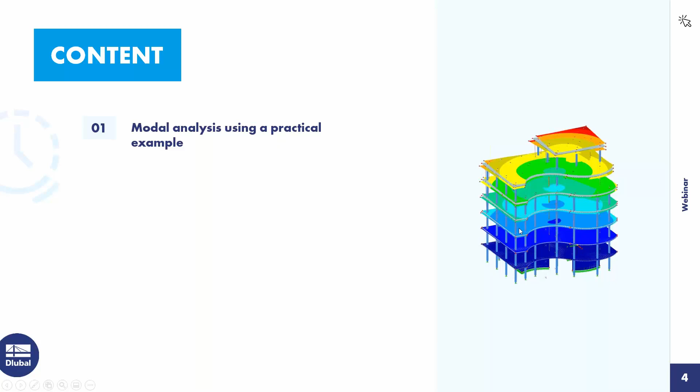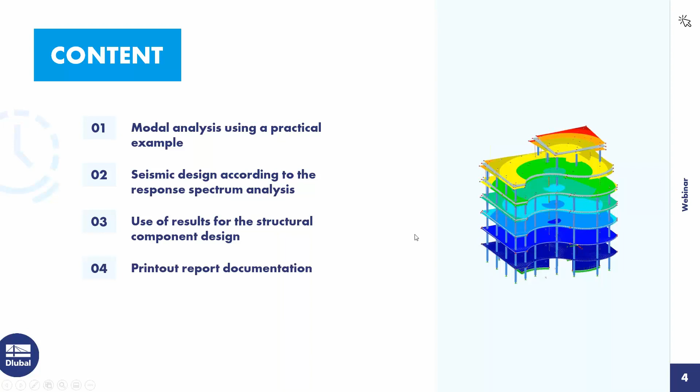To the agenda today, first point is modal analysis using a practical example. That's the example here on the right side of the screen. Then point 2, seismic design according to the response spectrum analysis. Then use of results for the structural component design. And the last point is printout report documentation. Then I hand over the screen to Stefan Frenzel. Stefan, it's your turn.

Okay, hello again. In the first part, I want to show you today RFEM 6 with the new Dynam add-on, where we want to do a modal analysis for the structure which you can see here on the screen. Our structure today is made out of concrete, so we have some concrete slabs, concrete walls, and also concrete surfaces, or floors. And for this structure, we want to do at first a modal analysis.

You see here in the control panel the material and also the surface thicknesses. I think that is already known. But how can we do a modal analysis in this case? In RFEM 6, we have a new type for modal analysis. It's not an add-on module like in RFEM 5. Here it is possible to do the modal analysis globally in the system. That means we will have the results in the table on the bottom, and also the input data in the navigator on the left side.

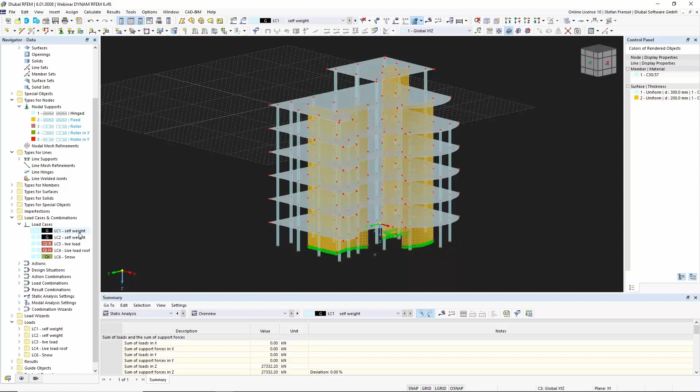A modal analysis is not an add-on module anymore, so we can define the modal analysis directly in a load case. That means we have the categories in the load cases, and for this category, static analysis is clear. We can calculate internal forces, but it is now also possible to do a modal analysis. If we want to do a modal analysis, it is possible to choose the masses which have to be imported in the program.

Therefore, you see here load case number 1, the self-weight. So we want to import the masses from load case 1 to this modal analysis. That means the self-weight is activated, and of course we have here some modal analysis settings. That means modal analysis setting 1. We want to calculate 4 eigenvalues with a Lanczos solver.

So here it's of course possible to change the settings, or you can also add some settings, or you can delete the settings if you want. These settings are normally just important for the modal analysis. That means at first you have to choose, of course, how many eigenvalues you want to calculate for the structure. In our case, we have 4 eigenmodes.

And of course, here it is possible to calculate automatically to reach the maximum natural frequency. That means you give in here a maximum frequency, and the program will calculate so many eigenvalues until 1600 Hertz in this case. For our example, we want to do a user-defined analysis. That means we want to calculate at first 4 eigenvalues. And that's normally all.

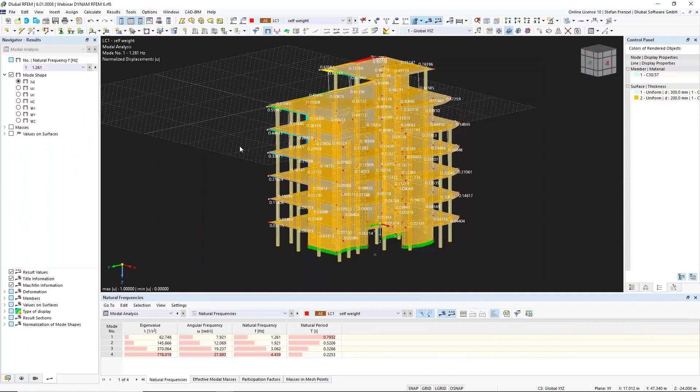And then you will see that the program will now calculate the eigenvalues of the structure with a Lanczos solver. Here just one core of the computer is used. That's caused by the eigenvalue analysis. It is not possible to use more cores than one. And then you see, of course, the results. That was really easy.

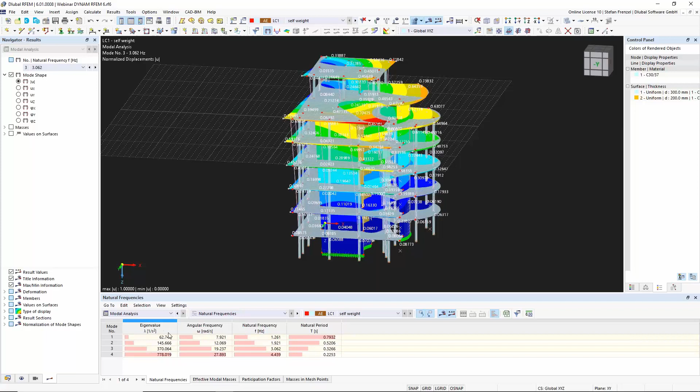So we have now here the natural frequencies, where you can choose, for example, the second frequency or the third one, and that's all in the navigator of the results. Another thing is that it's possible to have a look in the table on the bottom, where you can see the natural frequencies: the eigenvalues, the natural frequency, the natural period.

Then you see, of course, the effective modal mass factors. These effective modal mass factors are also important, because normally we need 90% of the effective modal mass in each direction for the earthquake calculation. And these ones you can see directly on the top or on the bottom.

We have also the rotational effective modal mass factors, but that's normally just for development. That's not so important for the normal user, because the normal user who wants to calculate earthquake loads normally uses just the translational effective modal masses, which are in X and Y direction, and maybe sometimes in Z direction. The participation factors are also given out here. You can see it on the bottom.

And then you see, of course, the masses in mesh points. Maybe you know this from RFEM 5. It was also possible to have a look at the masses in the FE mesh points. It's normally not so easy to take a good look in this table, because you have to scroll down and maybe you don't find the node you want. And therefore we have now a graphical output for that.

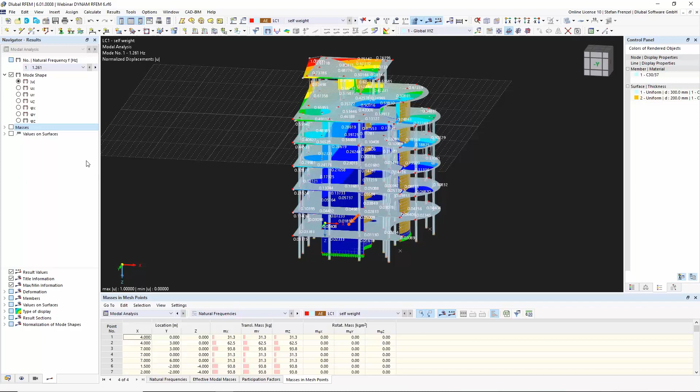That means you just go here in the navigator for the results, and if you click on masses, the program will show you all masses in each FE mesh point. That doesn't look so nice now, but I can zoom in a little bit. And then you see, of course, mass balls, we call them mass balls, in each FE node.

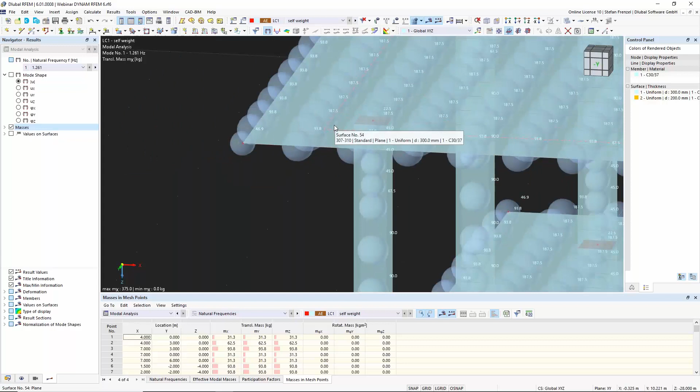And here, of course, you can have a look at them, and maybe you can also say, for example, you want to deactivate the masses for this surface or for this top surface, then you can control it afterwards. So that's what we want to do now.

We go on edit, and here in our modal analysis settings, we can neglect the masses. I want to use user defined, and I just want to select the surface. Then I just have to click my object, and that's all. So please neglect masses in all directions and around all directions.

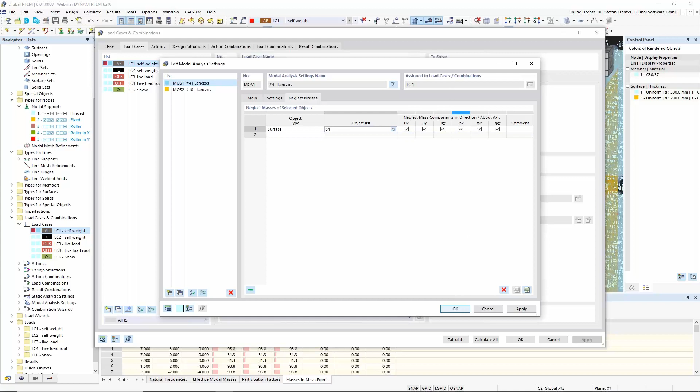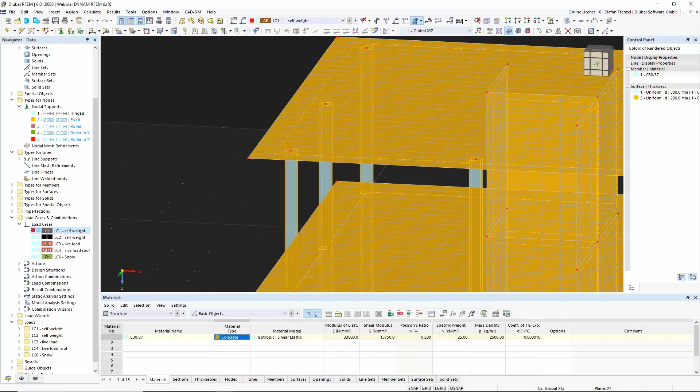And if I do this and do the calculation again, then I will get, of course, the result. And when I have a look at the masses now, all masses will be neglected on the surface. I think that's an advantage in RFEM 6 that was not possible so directly in RFEM 5, because here you see directly the values on each FE mesh point. And it makes it really easy to control the whole result.

Another option, if you do such a modal analysis: in RFEM 5 it was possible to add additional masses, but only in the add-on module. Here we changed it a little bit, and now it's possible to add masses with the normal nodal loads, line loads or surface loads. If you click here in the nodal load, for example, it is possible for the load type to choose a mass.

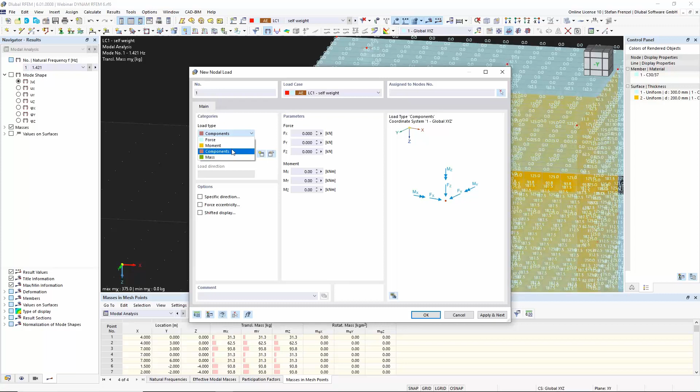And if you write in here a mass, maybe 20 tons, and you put it in here, then you will see in load case number 1 a mass ball with 20 tons. And this mass ball is also considered now in the modal analysis of the whole structure.

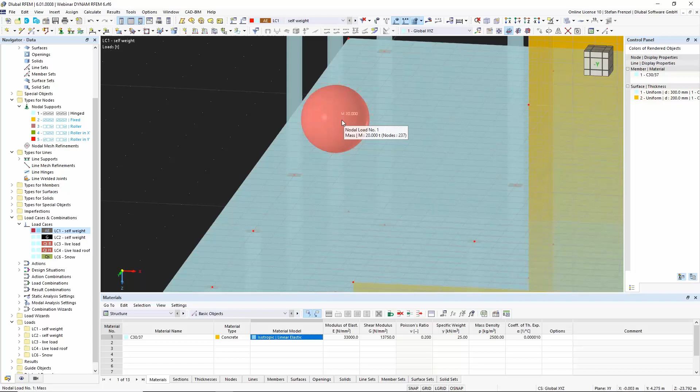That's what I want to show you here, because it's also possible to do it for surface loads and also for member loads, to add additional masses in the program and to have a direct view of them. That was not possible in the old programs, and that's also an advantage here.

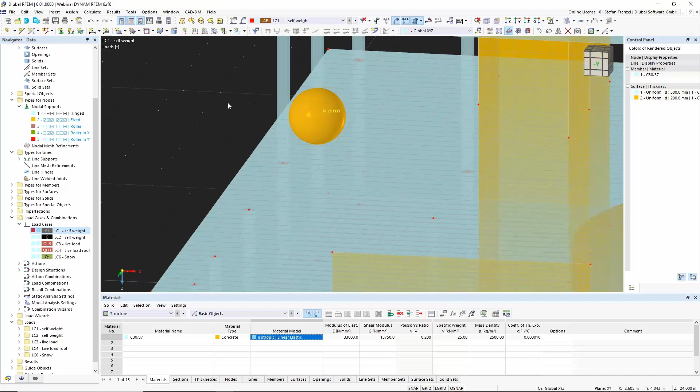So then I want to delete this load, because now we want to do a real modal analysis for the whole structure, and therefore I will first change my modal analysis settings, because here we also have the neglection of masses on, and we don't want this. And here we want to calculate 12 eigenvalues, but with a diagonal matrix, which is completely enough for earthquake calculations afterwards.

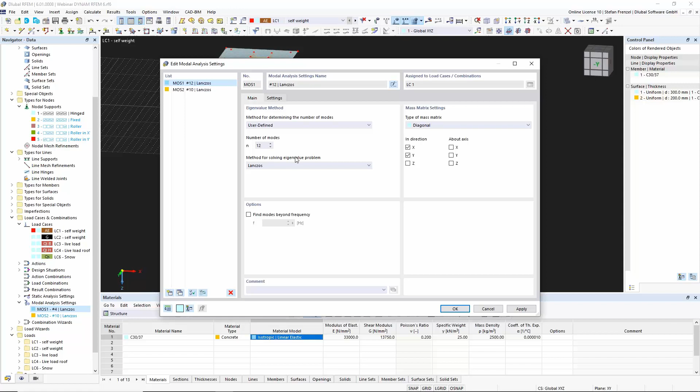Because we just want to consider the x and y direction, I deactivate the other direction z and also about the axes x, y, z, because it makes no sense for us, and the calculation is faster when I don't have to consider all directions. And of course it's easier for me to reach the 90% of the effective modal mass factor afterwards, so I don't need so many eigenvalues. That means the performance is better.

Okay, now we are here in our structure. In the old one it was normally like this, that we did a static analysis. Wait a second, I just have to change it back. Now we need, of course, a modal analysis. If we want to do such a modal analysis, I have to choose a design code first. For example, in our structure it should be Eurocode 8. You can also choose AISC or whatever.

That's not so important for the program, but the important thing is that we can now create a design situation. For this design situation, it's possible to create a seismic mass combination. That means the program will calculate a mass situation for our modal analysis according to a design code, automatically. So if I go now to action combinations and load combinations, the program creates a load combination.

So now I have my masses here, which I need for the design or for the modal analysis according to the standard. To take this mass combination or load combination, I can go into the base data load cases and create a new load case. This new load case should be a modal analysis. I have here my modal analysis settings, which I changed before - we want to calculate 12 eigenvalues with a Lanczos solver. That's all at this point.

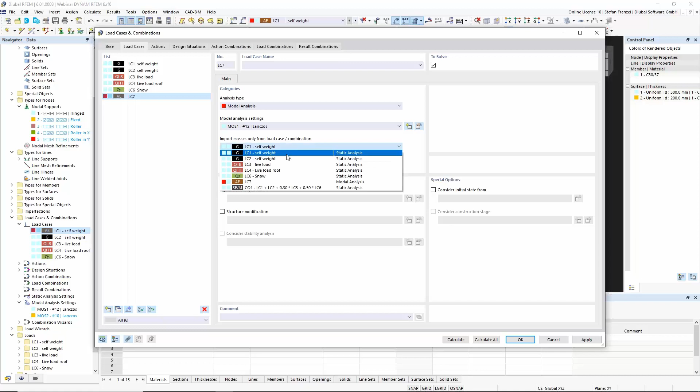The important thing now is that we can use the automatically created load combination for my seismic mass combination. That's important, because that was not possible in the old version. Here it is now possible to consider this mass combination or load combination for the calculation of the modal, or of the eigenvalues.

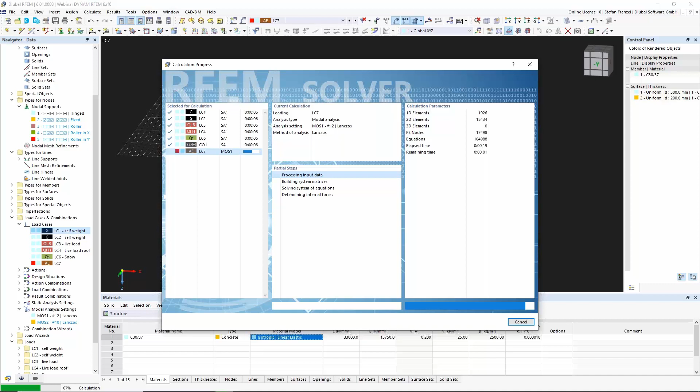With this option, we click OK, and then we do a calculation of the whole structure. You will see the program calculate all load cases, and of course the seismic mass combination, and afterwards load case number 7, my modal analysis. You also saw that the program calculated all load cases nearly at the same time - that means we have a multi-core calculation. The program can use all cores of your CPU, which makes it really fast in this case. So now we want to deactivate the masses because I don't want to see them.

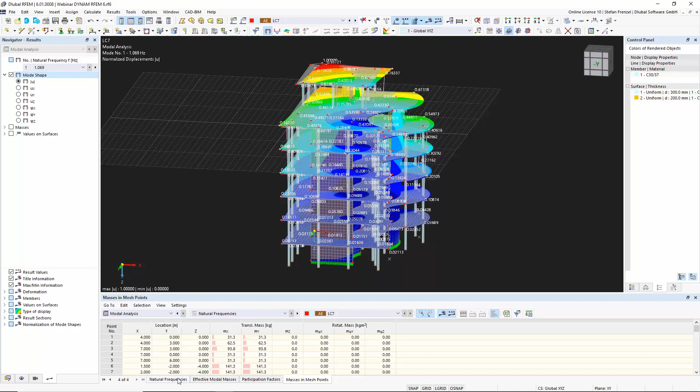Here maybe I want to have a look at the mode shapes. But what is important for me now is really easy - the effective modal mass factors. So I just have to click on the modal analysis, the natural frequencies, or the effective modal mass factors, whatever I want to see. And now I can see I have 97% in the X direction, and nearly 94% in the Y direction. This is really good for me, because with these values I can do a response spectrum analysis.

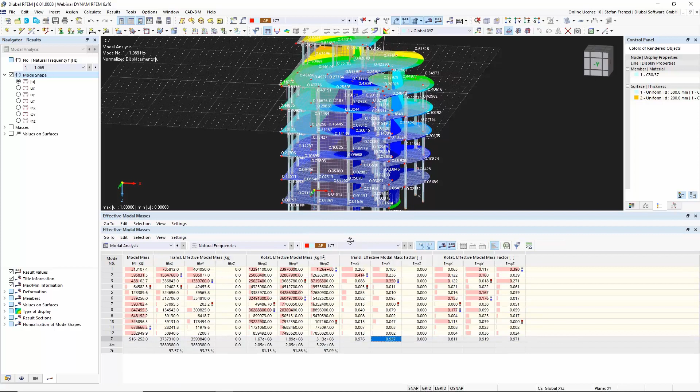But how we can perform a response spectrum analysis, that is now the important thing for us. To do a modal response spectrum analysis, we have to go back into the navigator, and click again on the base data, because here in the base data we can switch our add-on modules on and off, which is also important for us.

In this case, we go to the add-ons, and here it's now possible to choose the response spectrum analysis. The response spectrum analysis will calculate the internal forces of the whole structure, and with these internal forces we can work for the design of the concrete members or concrete surfaces, because afterwards we can create a result combination with the maximum loads, or the maximum internal forces. So now you see here the response spectrum analysis, which we added.

Then we have to go into the Standards 2 button. Here you see, okay, we do the calculation according to the national annex of the Eurocode. And for this national annex, we can now just create our response spectra here.

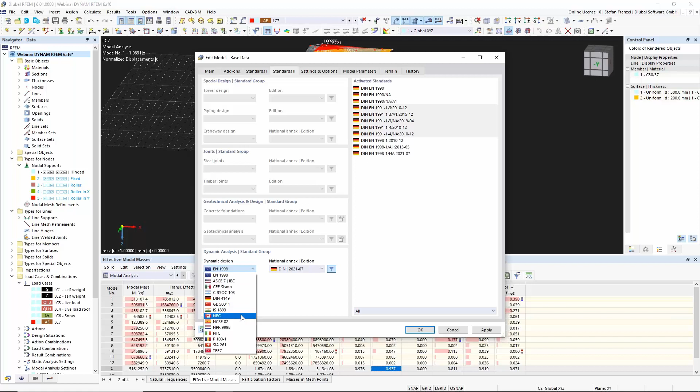If you want a response spectrum according to another code, then you have to change it in the Standards 2 window, the national annex or the design code. You can also choose the ASCE 7, or you can also use the old DIN. Of course, you can use the Eurocode with other national annexes which are now available for the program.

You see that we have a little change in the national annexes, because now you see the year of the national annex. That's also important, because then you know what national annex you want to use. We also have some national annexes which are marked red, because they are normally not usable in Germany, for example. That's the old one, but here we have the new revision, and therefore we can take this one.

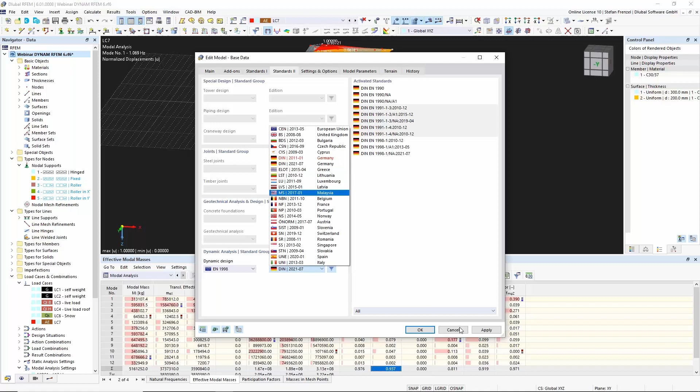Okay, oh sorry, I closed it with cancel - that was not so good. I have to activate it again. Okay.

So if we do such a calculation, or if we do such a response spectrum analysis, then you see that we have here spectral analysis settings as a new part. And of course we have the dynamic loads at the bottom.

The dynamic loads are also important, because in the dynamic loads it's possible to create response spectra and also to use accelerograms from real earthquakes. These are recordings from real earthquakes, and you can use these accelerograms to do a calculation of the response spectra out of them. So, but how can we perform now a response spectra analysis?

Okay, that's really easy. We go here on edit again in the load case and create, of course, a new load case. In this new load case, we have now a new analysis type. So you see that we do nearly everything in the load case, and here it's now possible to do a response spectrum analysis.

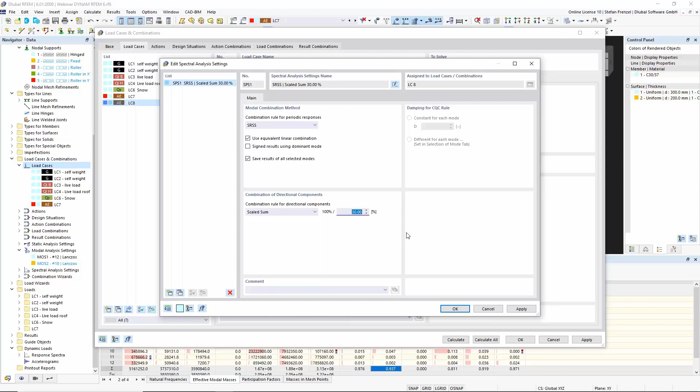In our case, we want to take this one, and we can also confirm with a click on OK. Then we see, of course, some small info about it: SRSS rule, scale sum, 30 - that means scale sum 100% and 30%.

It's also possible, of course, here in the options to consider the accidental torsion. That means we have to give in the eccentricity, which we can calculate, of course, by the building length. So we can activate this, and the program will also take directly the building length in X and Y direction. We can also take a user-defined length if we want.

These 5% are out of the Eurocode. Maybe other codes have another value. That's why you have the option here to change this one. Okay, in our case, we don't want to consider the accidental torsion.

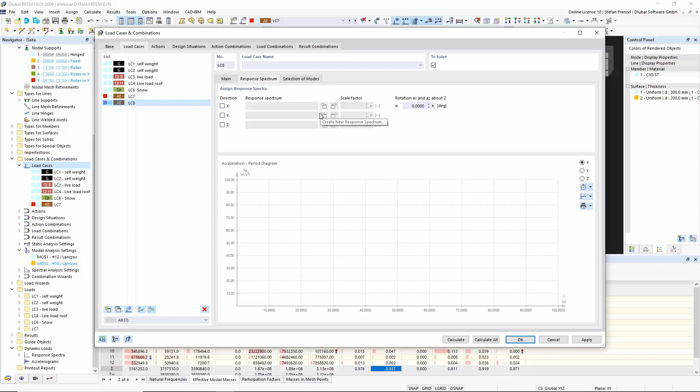We want to switch now to the response spectra, because we have to edit, or we have to create at first now a response spectra, what we want to use here for the calculations. In our case, we want to have a response spectra in X and Y direction, because the Z direction we neglected before for the modal mass analysis, so we don't need this anymore. So we do just a calculation for the X and Y direction.

And here for the response spectra, it's now possible, of course, to edit the response spectra. As I told you before, you can see here the definition type according to standard Eurocode 8 from 2021, so from this year. And here it's also possible to give in a user-defined one, or to generate from an accelerogram.

Therefore, of course, we have here a database I can show you from library, and there you see, of course, many accelerograms.

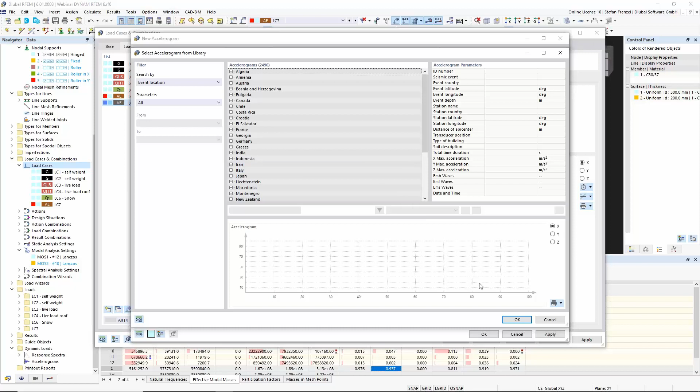So we have here 2,490 accelerograms from all over the world, which you can use now to do a calculation, or which you can use to create a response spectra out of that. Yeah, for example, Georgia. This one you can use also.

But here we want to use it from the Eurocode. If you want to use the spectra from the Eurocode, we have to go... wait a second... on dlubal.com. And here's a possible... wait a second, sorry, that is in German.

That was not so good. Here you see on support and learning, or no, on the solutions, sorry, the snow load and wind speed seismic load maps.

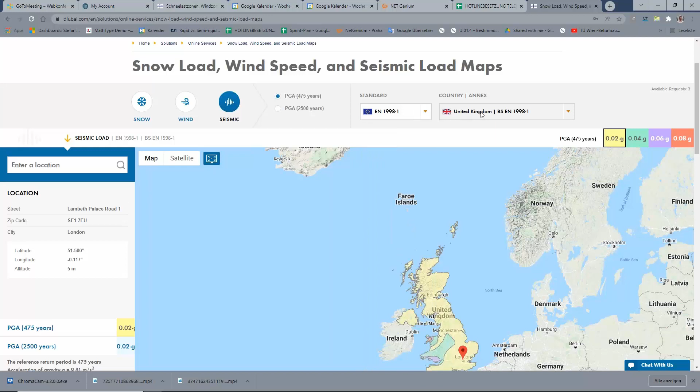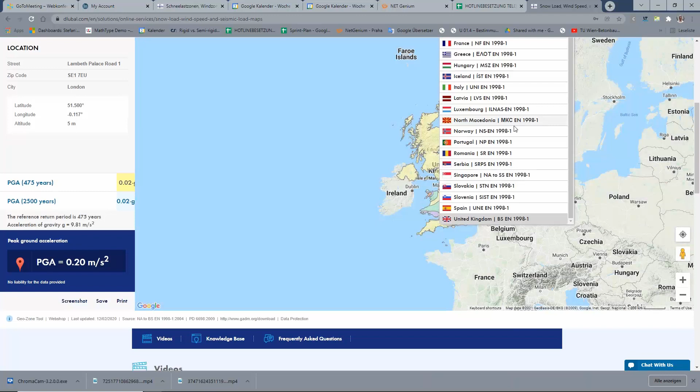And for these ones, of course, you can choose here seismic and can take the values, for example, here, maybe from Germany, Eurocode 8, and of course... no, I can't find Germany. Is it my problem?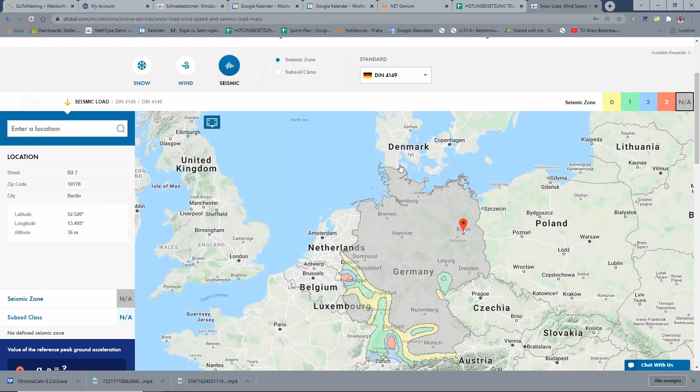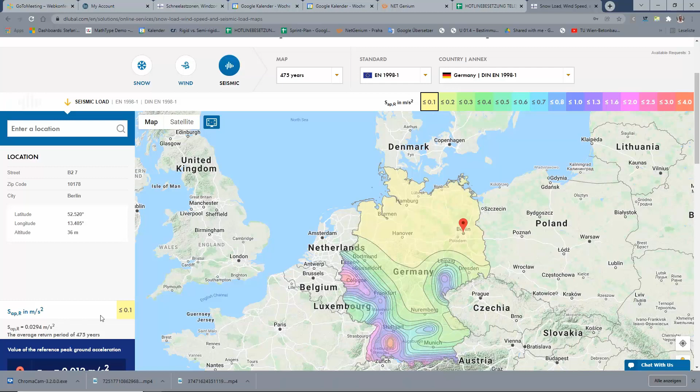Okay, we see here the old German code, but here normally we should have also, now we have Germany. Okay, sorry. And here you see, of course, the SAPR, so that means it's the spectral analyze, or the spectral value for that. And of course the AGR, so which is the acceleration for this, for Berlin, for example.

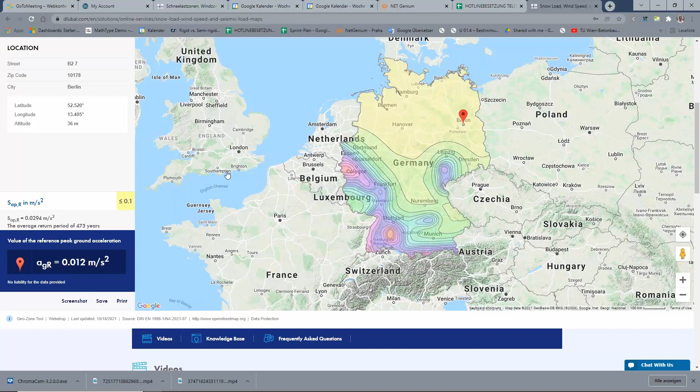Otherwise, is it also possible to enter a location and to get here the real values what you want to use in this case. Here in our case, we take the input values which are given directly. It's also possible, of course, to take here maybe another ground type, or maybe we take here another value. SAPR is 1.5. Yeah, okay, that's okay.

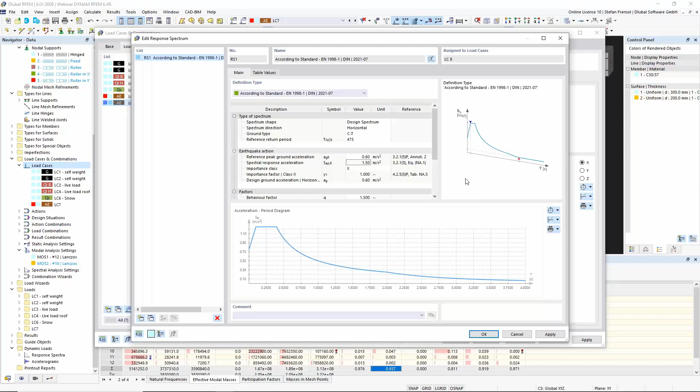The important thing here is that you see, of course, the response spectra, and if you click here on OK, you have here a selection of the modes. The selection of the modes were also in the old Dynam Pro module in RFEM 5. You find it here now also in the load case, because it's now a property of this load case.

And here it's, of course, possible to take here the 5% value. That means for you, okay, we have now here 91% in X direction, which is of course okay, but here in the Y direction we have just 87%. So normally we need so many eigenvalues that we reach the 90%, and we can, of course, take all eigenvalues which have a higher factor than 5%.

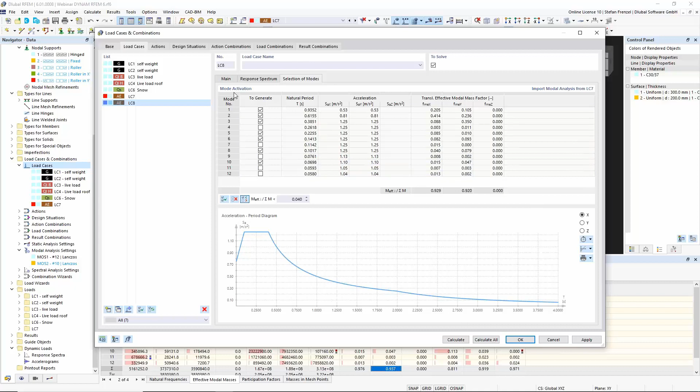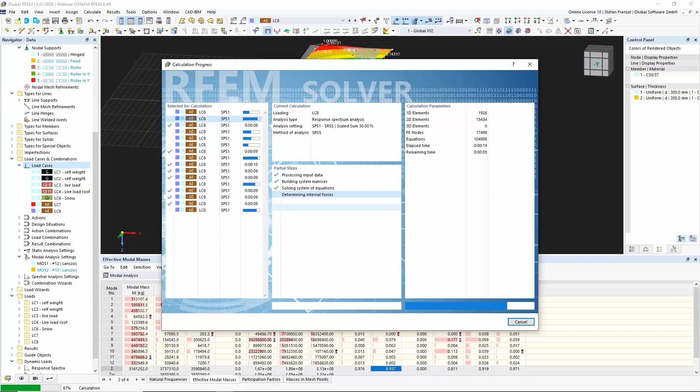Now we can go back on the main tab, and now it's possible, of course, to calculate all. You see that the program will calculate now many load cases, so that are sub-results, and that means the program will calculate them internally and will give you then, of course, the results for this one. If you deactivate the sub-results in the spectral analysis, then the program will just calculate the X and Y direction, and that's all normally.

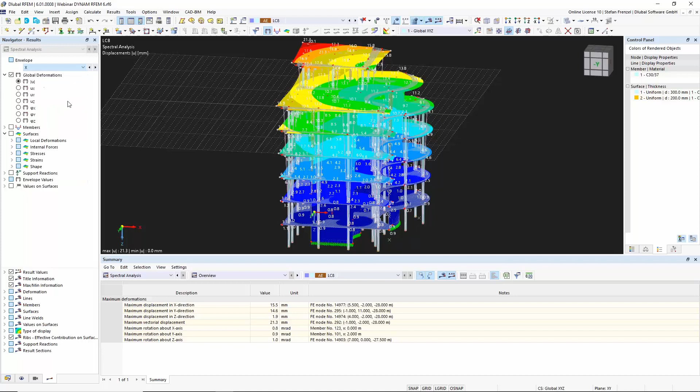Now you see, of course, here the results. At the end, the important thing is the scale sums envelope. That means the 100-30% rule or the 30-100% rule. That's the scale sum envelope. But here we give you also the X direction, so all results in X direction, and of course all results in Y direction. And then we give you, of course, the results for each mode in each direction.

What you can see here now, we just get internal forces. So the program will do a calculation of the internal forces directly. That saves a lot of performance, because in the old program we calculated some earthquake loads, and we got in the old program in each FE mesh point an earthquake load, and that was really time consuming in this case. So we switched a little bit, and we calculated here directly the internal forces for the whole structure, which makes it easier and more efficient.

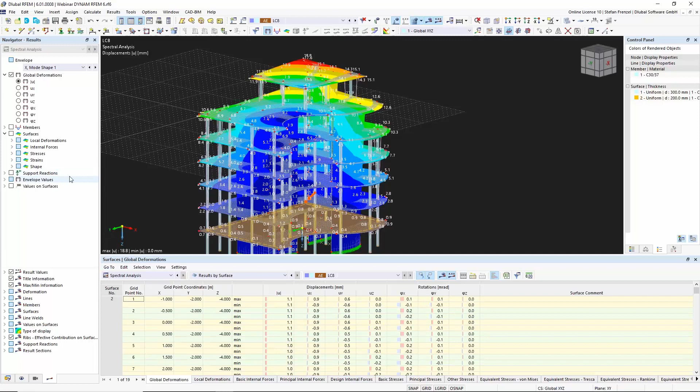You see, of course, here for the spectral analysis an overview, and of course the load case number 8. Here it's also possible, of course, to have a look on the results by the member. Yeah, that's always possible. Normally, is it enough to have a look here on the results? Yeah, because these results of course are important for us.

But at the end we have to do normally a calculation of a new load combination or of a new result combination, where we also consider the self-weight of the structure. So that are just the earthquake loads in this case. And that's now, that was the problem in the old program.

In the new program, it's no problem anymore, because here the program will do a calculation of this special design situation, and will do it completely automatically. So how can we do this special design situation?

Therefore, we can go back in the edit module for the load cases, and here it is possible to create a new design situation. For this design situation, we take the ULS Seismic. And for this ULS Seismic, it is possible to create a result combination. So that means all design situations, or for this design situation type... oh wait, I have to cancel this because we already have a design situation, we need a new one.

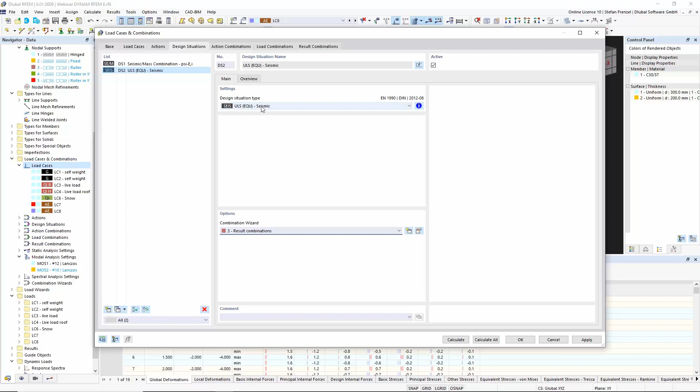So in this case, we create a seismic design situation, and the load combination according to the result combination calculations. That means the program will do this special design situation for us with a result combination. So we can click on the result combination, and then you see the assignment, and you see that the program will take the maximum internal forces out of the earthquake design in this design situation.

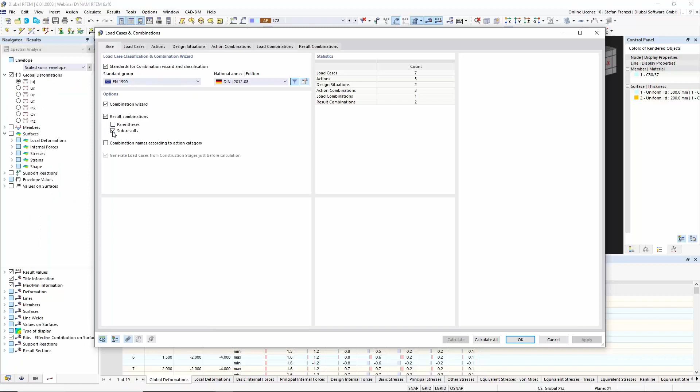I just want to show you that it's also possible to activate sub-results for the result combination. Because when I activate the sub-results, it's possible for me to choose the scaled sum of the envelope, or to use just some individual mode shapes. For example, if I just want to consider the X direction for my design situation, that is also possible here. So I don't have to use the scaled sums. It's also possible to take another value for that. That is also new. The program will do the calculation completely automatically.

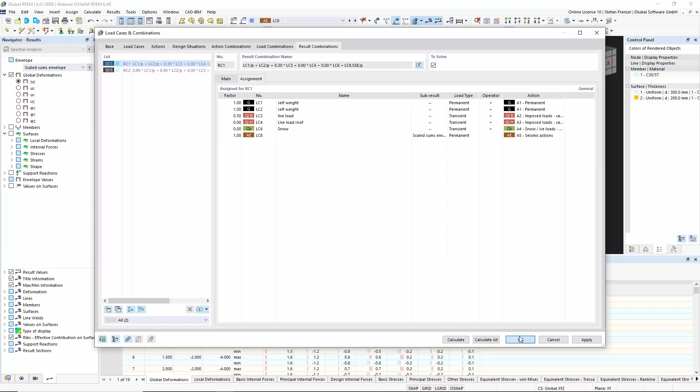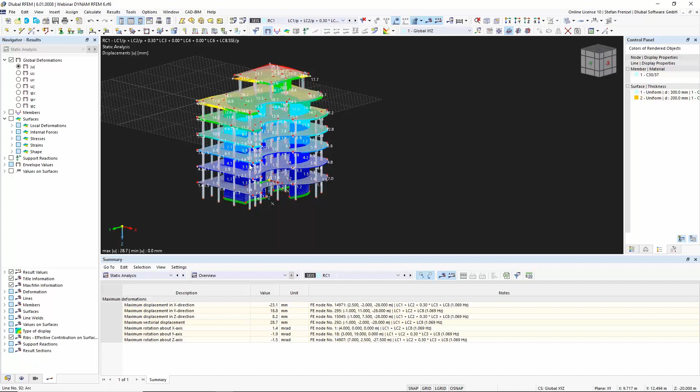That means if we click OK, then it is possible to do the whole calculation again. So that was all in this case, and I can have a look now at my result combination, where the self-weight of the structure is considered, and also the earthquake loads are considered. And with this design situation, it is now possible to do a design according to a material standard.

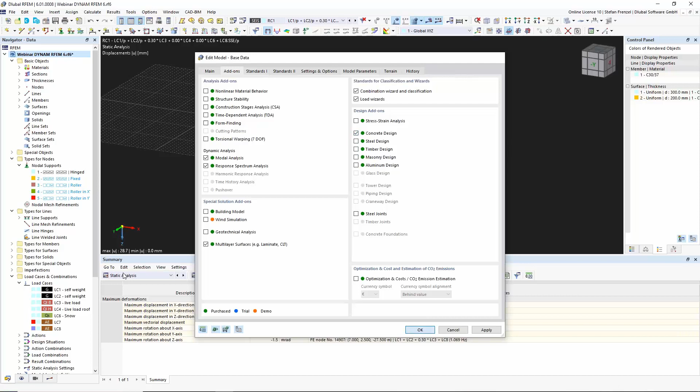For example, we can do it like this. We go to the base data and say, okay, we want to activate the concrete design add-on module. Then it is also possible to go here in this design situation. This was this one. Wait a second. What is the problem? Oh, wait. Base data. Okay, I clicked again on cancel, and that was my problem.

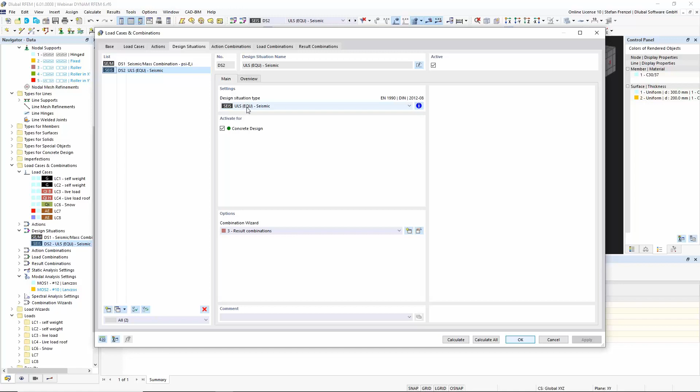So here it's now possible to go on edit, and then it is possible to do a concrete design also for my seismic design combination, which is normally a special design situation and normally not the ULS in this case. Normally you take other design situations, but it's also possible to do this calculation for the whole concrete structure and to design according to my maximum earthquake loads. So that was it for the calculation, getting the results, and the combination of the results.

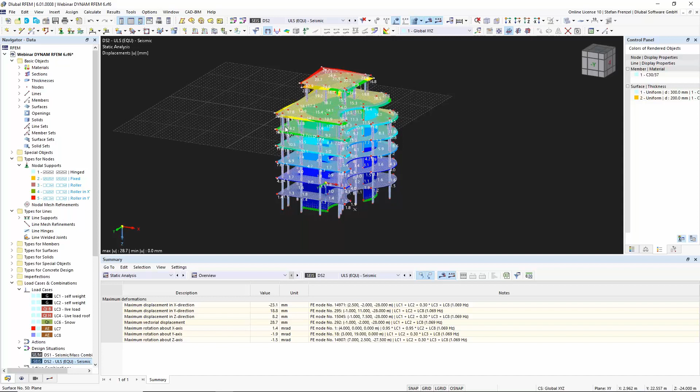The last part I want to show you is that it is also possible to get the shear forces for each floor and also the deflection for each floor. That was also wished for RFEM 6. Therefore, we have in the base data an add-on module which is called building model. When you activate this, it is possible to define the floors on your own, and then get the results for each floor in the calculation.

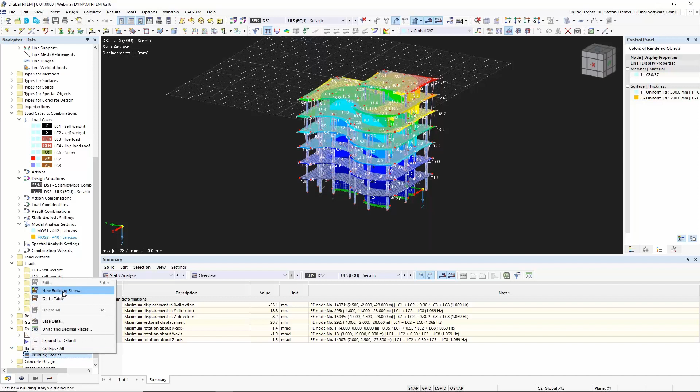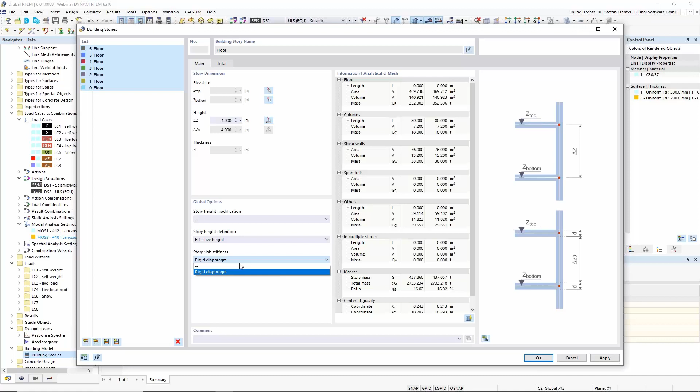Therefore, we just have to define the building model first. That means we want to create a new one. My Z top is -4, and here I want to create 6 floors without any diaphragm. You see, it's also possible to do a diaphragm calculation afterwards. But in our case, we created the whole structure with the real floors, and therefore we don't need a rigid diaphragm. That's why I delete this one and click OK.

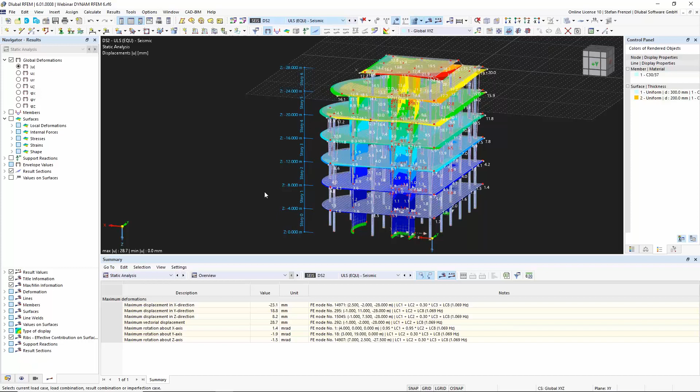So the program now creates my 6 stories in this case. And here it's now also possible to get the results for this. Therefore, we go, for example, to load case number 8, spectral analysis, and here we now have results by stories, which is really new in the program.

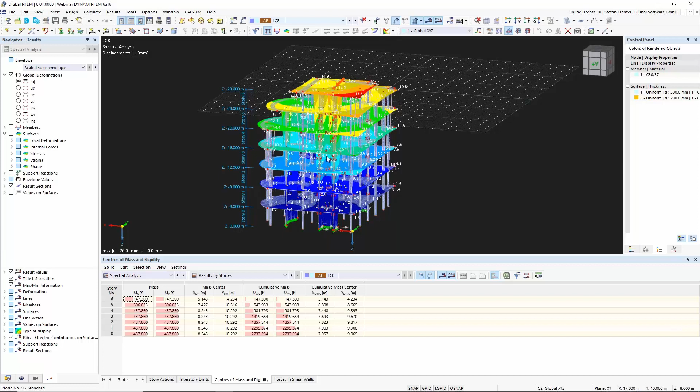Here you see now, of course, the story forces from the earthquake calculation. You see the centroid coordinates and the interstory drifts, which are also important. Afterwards, maybe you want to do something in the direction of pushover, or you need to consider the story drifts for the calculation of second order theory; then you get the story drifts directly. You see the centers of mass and rigidity for each floor, which is also important. And of course, you will get the forces in the shear walls.

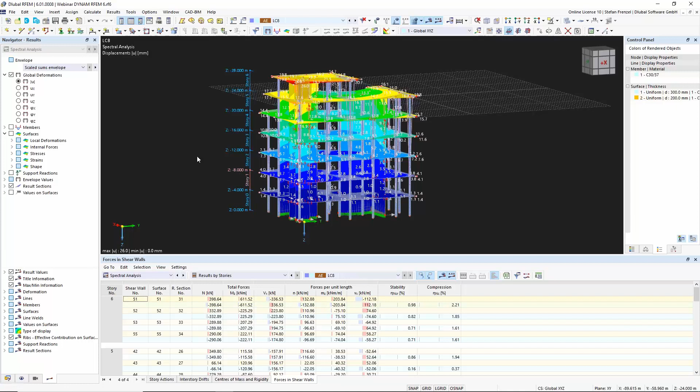So the program will create result sections for each shear wall, and you can use these values directly to do a shear wall design for each wall in each story. That's also something new in the program that I want to show you.

You see here the result sections. There you see each shear wall for each floor, and these shear walls you can design afterwards. And of course, you will get the forces per unit length for each shear wall.

Okay. Then we want to come to the printout report. I just want to show you the printout report a little bit. You can click here on New Printout Report. In the printout report, you will find the add-on modules like in the old RFEM. So you will get everything you did in the program directly in the printout report, which makes sense, of course.

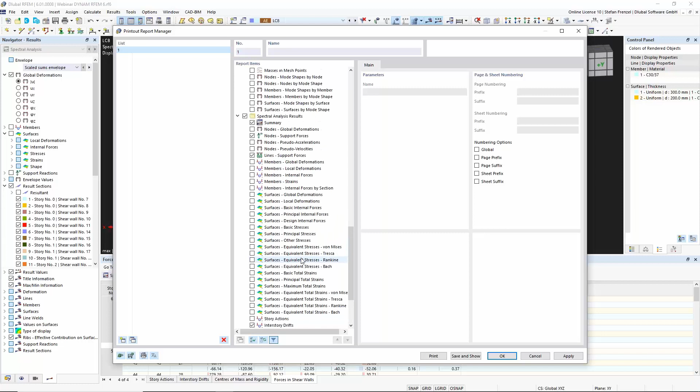So what we don't want to see: spectral analysis, support forces, maybe internal forces, by sections we don't need. The interstory drifts are important for us, and the forces for the shear walls. Modal analysis settings are also important. Then you see what's possible here, the concrete design. We don't want to see graphics in this first one.

Then we can click OK, and the program will calculate the printout report. What's new in the program is that it's now possible to work in the structure while the printout report is processing, so you don't have to wait for it. The printout report is created. Then we want to open it.

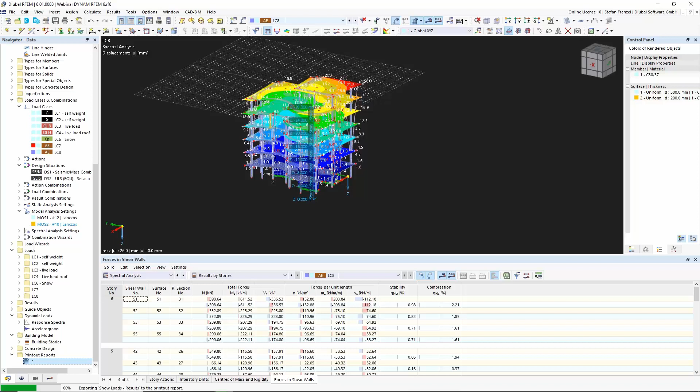And of course, you will see here the printout report. It's now possible to switch the printout report to the side, then you can go to RFEM again and work with RFEM. Normally it should work. Okay, it's been generating.

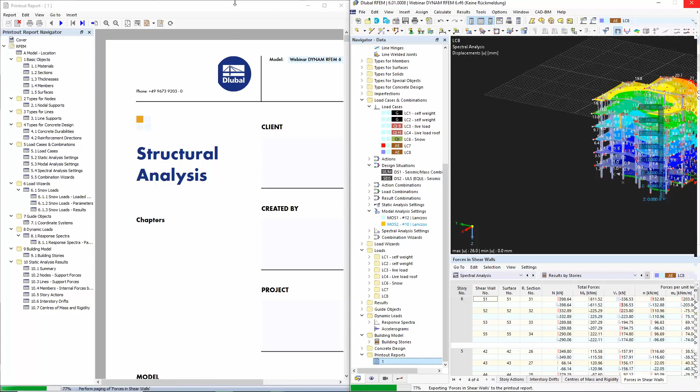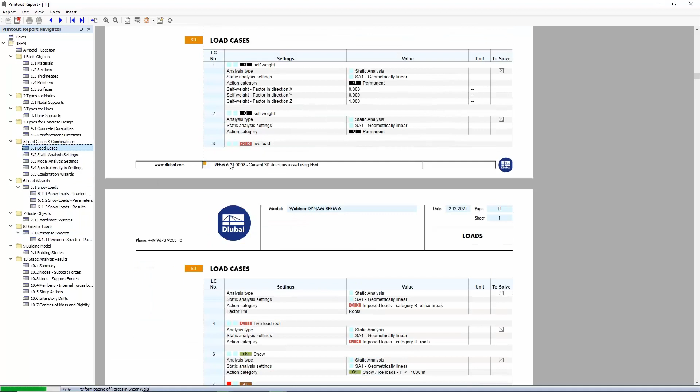You will get all the stuff here: the response spectra parameters, the building stories, and the load cases. In these load cases you will see, for example, that you have a modal analysis and a response spectrum analysis, with all options used for the calculation. Then you get the static analysis results, and at the end also the modal analysis results.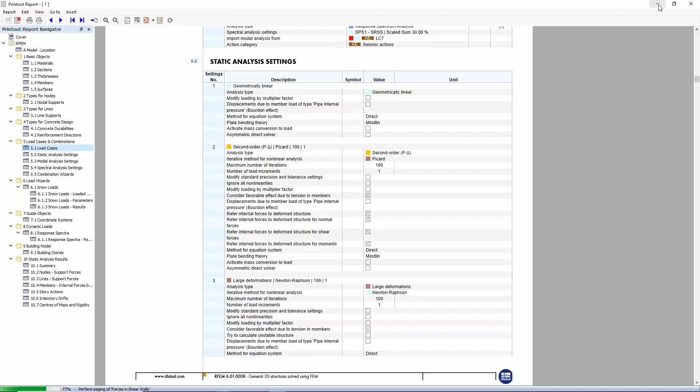What is normally also nice is that you want to print some pictures. That's of course possible. Wait a second. Okay. Yeah, Stefan, I think the forces in shear walls are printed in the printout report. That's a lot of content, maybe not a good idea. Okay, that would take some time, but it doesn't matter. You showed the printout report.